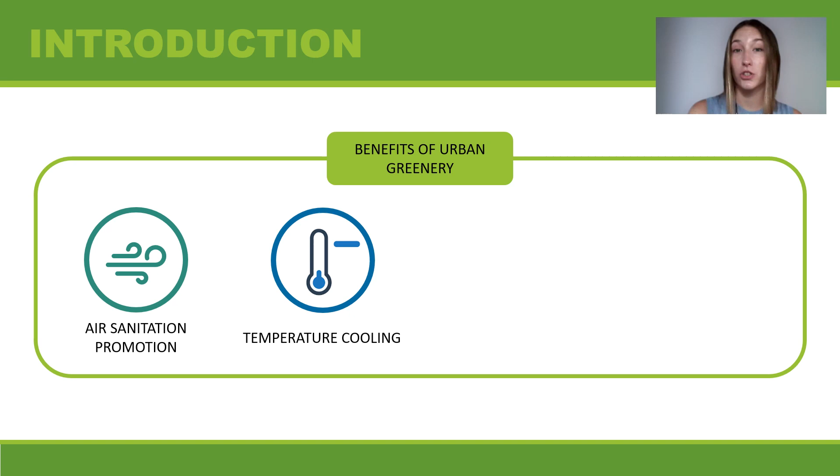Green spaces add to the provision of ecosystem services in urban areas. Urban greenery encompasses parks, squares, street trees, and private gardens, and comprises a significant aspect of all cities. They allow us to mitigate harmful effects of environmental pollution by promoting air sanitation, cooling temperatures, retaining precipitation, and attenuating noise through sound absorption capacity.

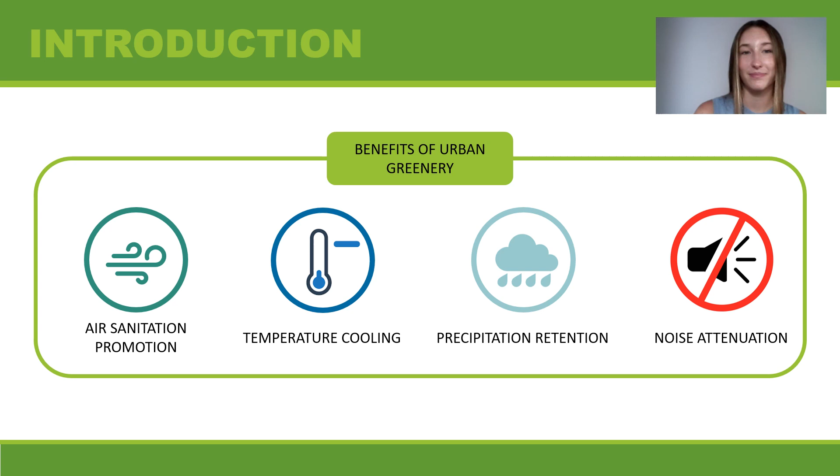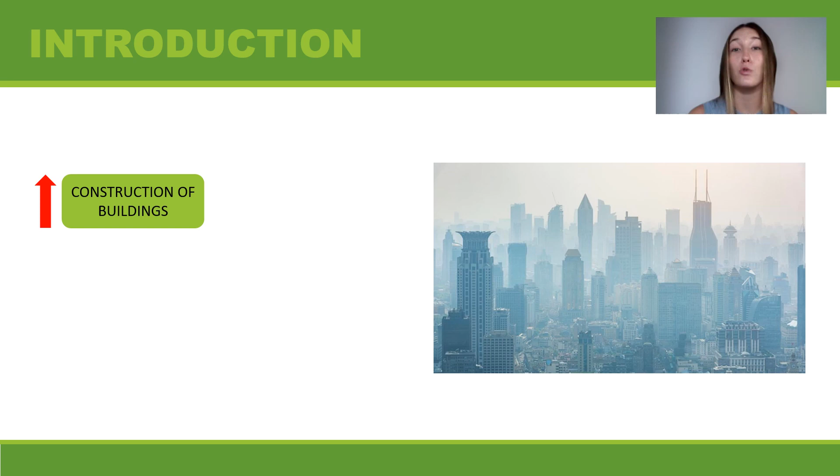Throughout the years, exacerbated by population growth, cities have increased the construction of buildings and streets to satisfy people's needs. This way, green spaces have been displaced and reduced, and with them the benefits they contribute. If this growth were to occur without fundamentally addressing the climate impacts of intensified urban development and global warming, many cities will become much hotter and less livable.

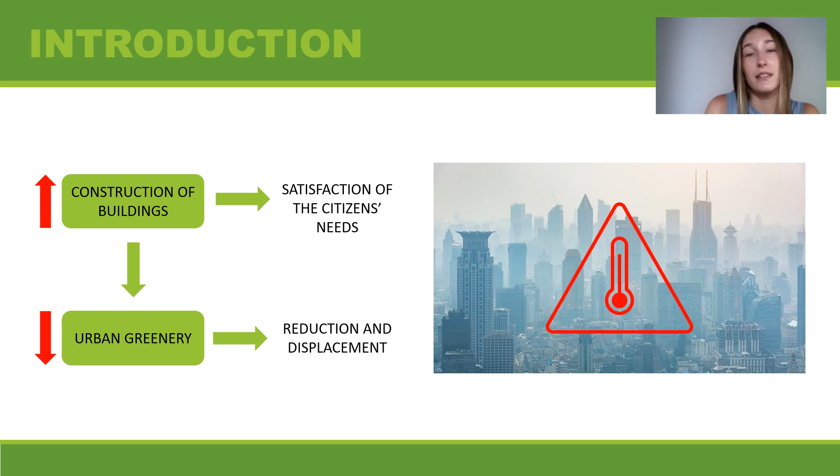The United Nations 2030 Agenda and its Sustainable Development Goals have developed a path to stop and mitigate this heating process taking place in many urban areas of the world. More specifically, there are two SDGs that refer to this issue. First, SDG number 11, which centers around making cities and human settlements inclusive, safe, and sustainable. And then SDG number 13, which looks forward to taking urgent action to combat climate change and its consequences.

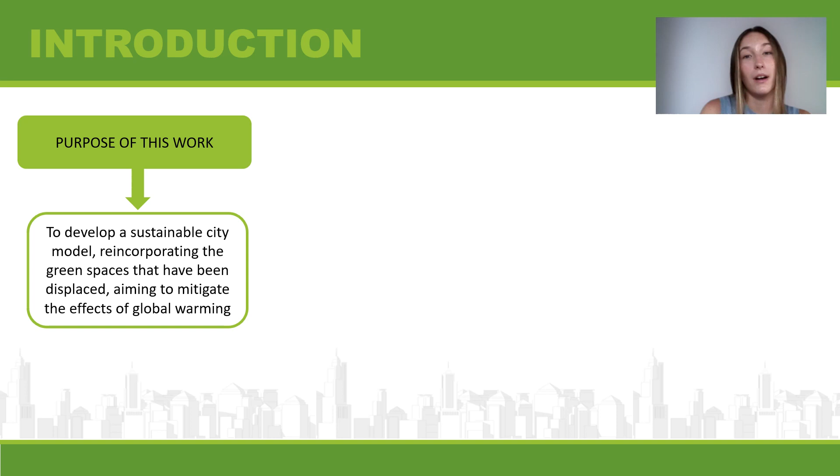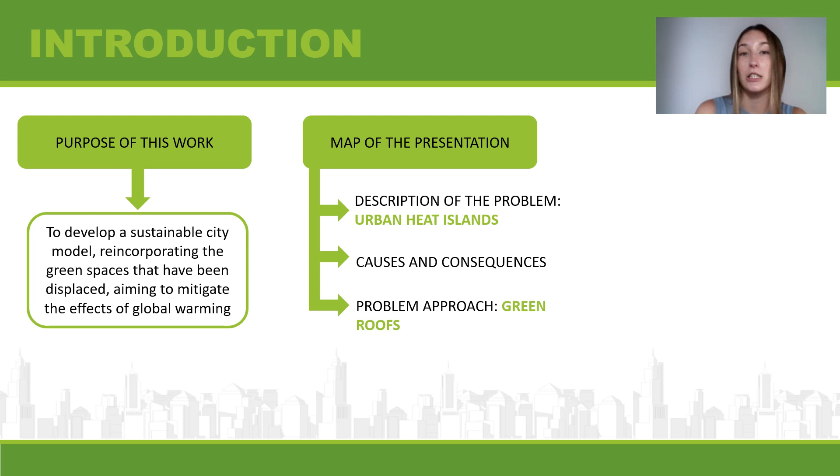The purpose of this paper is to develop a sustainable city model reincorporating the green spaces that had been displaced, aiming to mitigate the effects of global warming. To do so, a description of the problem and its causes and consequences will be introduced. This will be followed by the presentation of green roofs, used as a construction method that incorporates greenery into its structure. In the last section, an evaluation of the effectiveness of this proposal will be introduced.

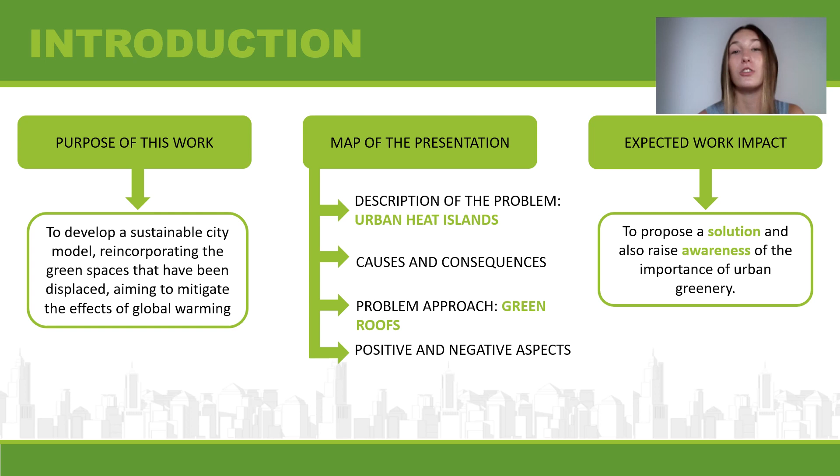It is expected that this paper may not only propose a solution, but it may also raise awareness of the importance of urban greenery.

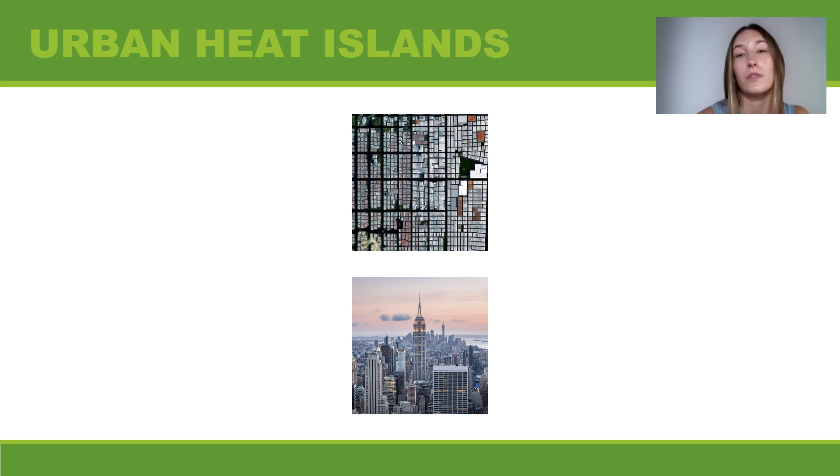Due to overpopulation and the consequent housing emergency, construction companies are supplanting much-needed vegetated surfaces with more and more buildings made of low albedo materials. Albedo is the relative amount of light that a surface reflects compared to the total incoming sunlight. A surface with high albedo will reflect more sunlight than a surface with low albedo. Therefore, low albedo materials used for constructing high-density buildings are one of the major causes of increasing temperatures in the urban environment, known as the urban heat island effect.

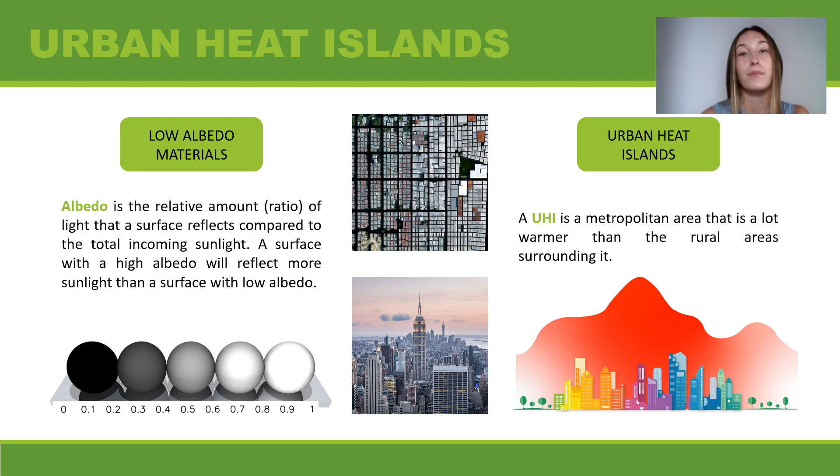The urban heat island is a metropolitan area that is a lot warmer than the rural areas surrounding it. This is the reason it is theoretically considered an island.

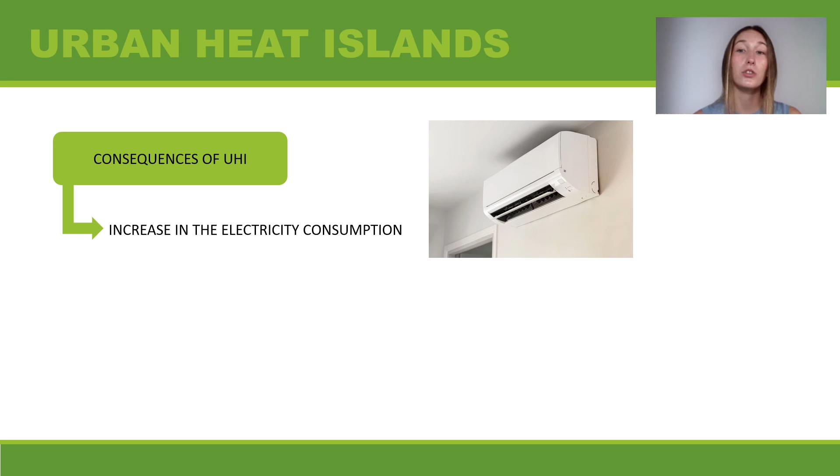The temperature rise carries a variety of consequences that affect many aspects of an individual's life. Some of them are the increase in electricity consumption due to the need of regulating the temperature inside buildings for the owner's comfort. Here, a vicious cycle begins to generate, where due to the increase in temperatures, the necessity of air conditioning also increases.

Then we have the reinforcement of climate change, because the increase in electricity consumption adds to atmospheric pollution and greenhouse gas emissions.

Then there is impact on water quality, because the transfer of excess heat accumulated in rainwater produces hot currents that are dumped into streams and rivers. This can also be harmful to the health of the ecosystem.

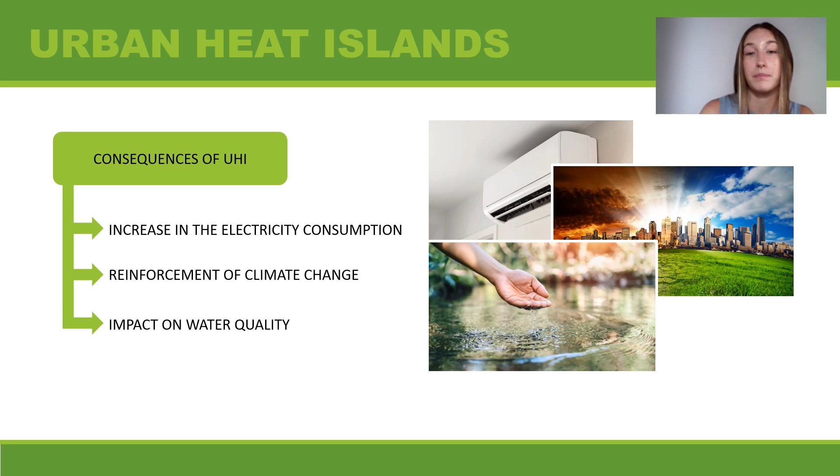And then we have the deterioration of human health, since heat waves generate discomfort, breathing difficulties, exhaustion, and even cardiac arrests. These high temperatures also generate certain conditions that, combined with other factors such as water storage and poor hygiene, cause an increased risk of diseases such as dengue, for example, nowadays.

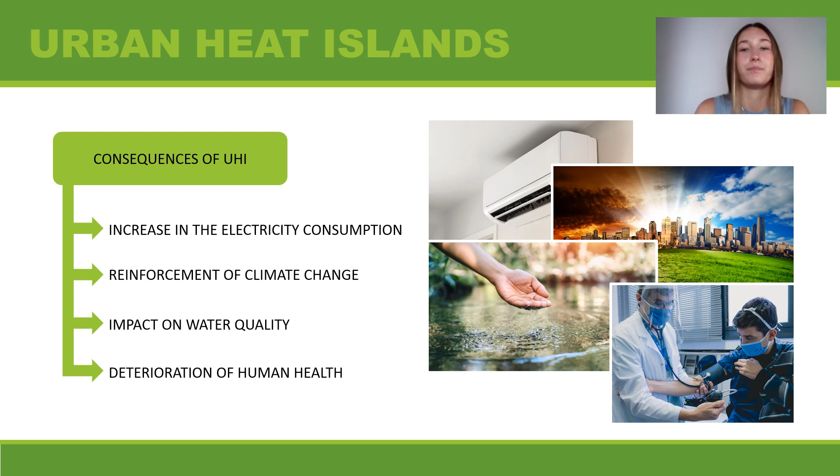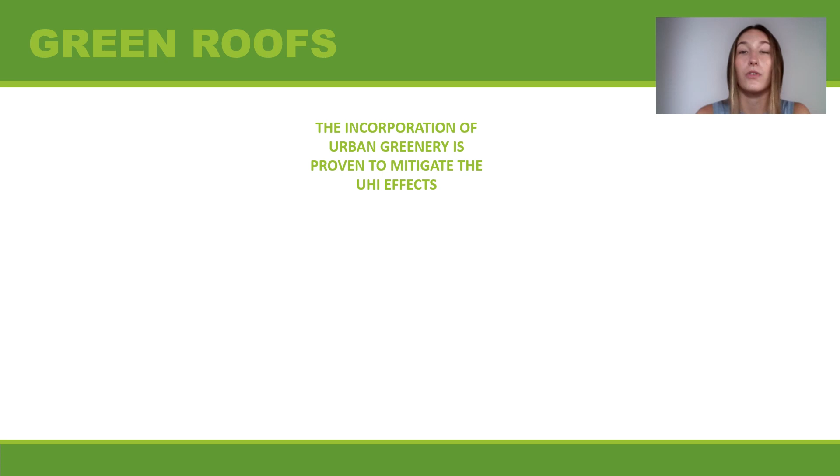The lack of green spaces in highly urbanized zones increases congestion and pollution daily, and consequently impacts citizens' lives. Therefore, the incorporation of urban greenery is proven to mitigate UHI effects. An innovative and less conventional way to integrate spaces for growing greenery are green roofs.

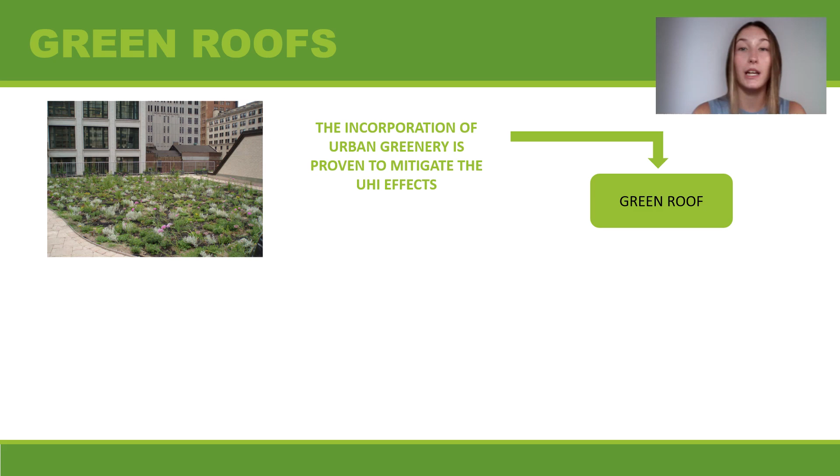A green roof is a building system with a plant finish on a bed of soil or substrate that is especially designed for obtaining environmental benefits. The plant cover may be total or partial, and it does not refer to terrace roofs with potted plants, but to building technologies for improving the habitat or saving energy consumption, or technologies that fulfill an ecological function.

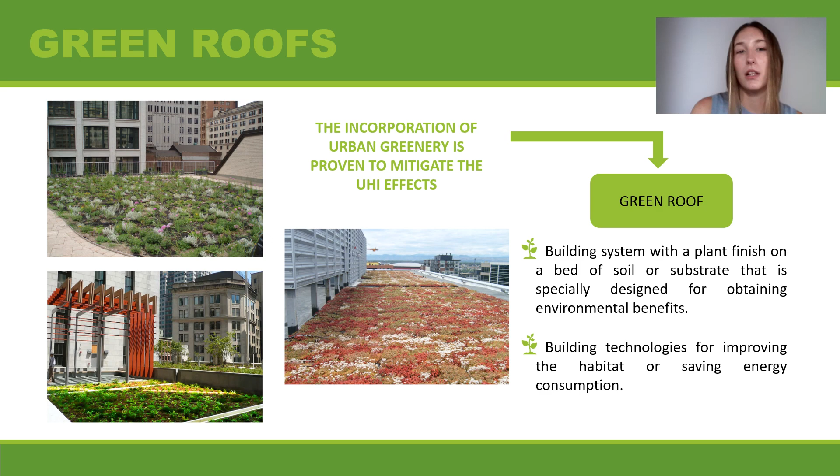Green roofs can be classified according to either the type of plants desired to place or the structure in which it will be located. First, we have the extensive green roof, recommended for building structures with limited load-bearing capacity and in areas with no or minimal regularity of use. It provides a meadow effect, which requires only low maintenance.

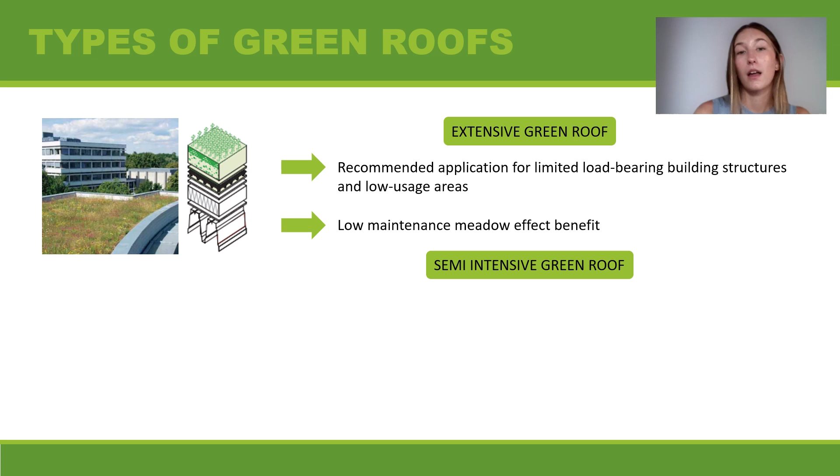Then we have type 2, semi-intensive green roof. It is used where there is the desire to create a pleasant environment that can be used by those working or living at the location. This roof is ideal for the creation of an outdoor living space. It utilizes basic plant types, which require more maintenance than the extensive roof.

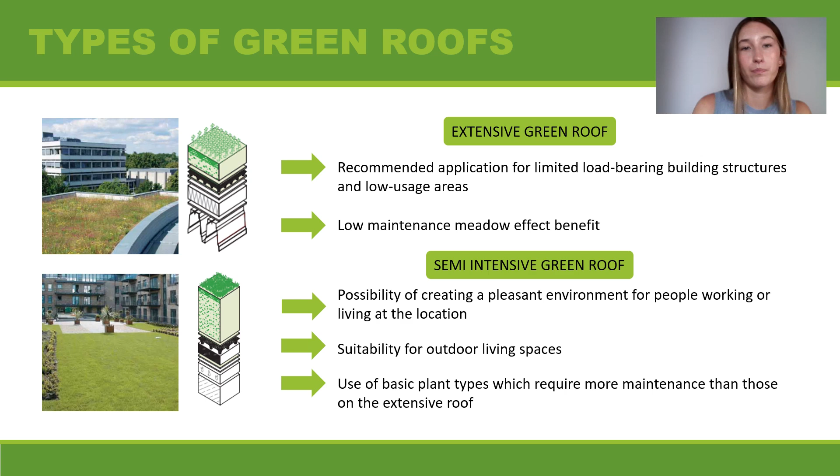Moving on, we have the intensive green roof. It's a system designed as a landscaped roof garden, which might include an irrigation system. It opens practically all the possibilities of normal ground-level gardening, and it is ideal where a suitable, strong load-bearing structure is available.

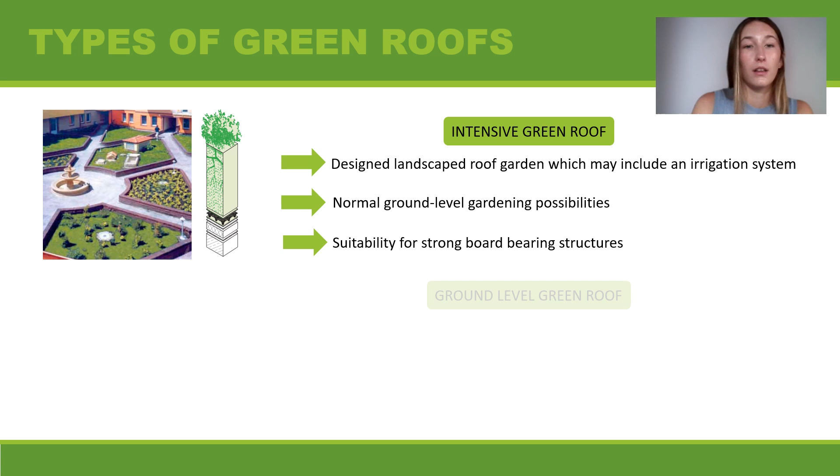And next, we have the ground-level green roof. It is used in circumstances where substantial planting is realized using heavy mechanical plant and equipment during construction. It is considered suitable for ground level structures such as underground car parks.

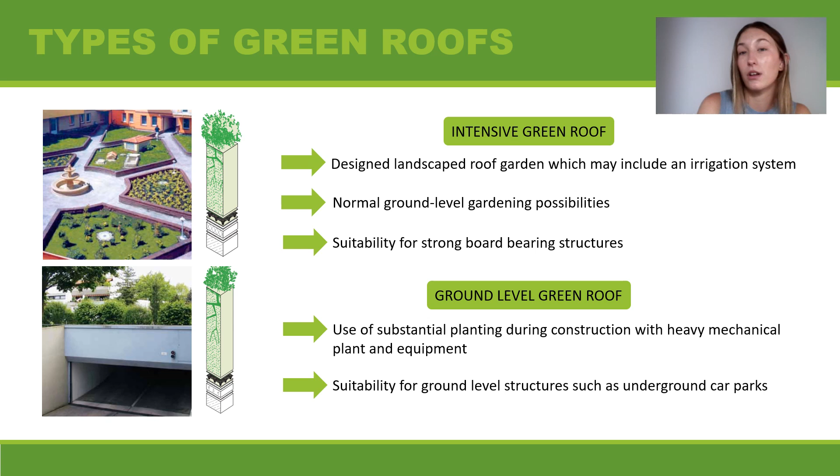Every green roof must have a good composition of layers of suitable materials that provide it with a proper structure. So next, a typical build-up of a green roof model will be presented.

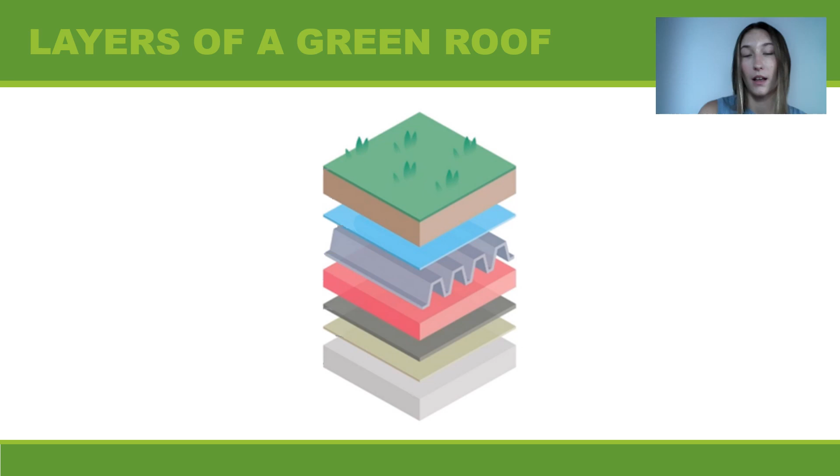On the top, we have the plant cover. The type of plants used depends on whether a low-maintenance extensive roof is chosen or an intensive one. The former is limited to succulents, grasses, and herbs, and the latter can be planted in accordance with the wishes of the gardener.

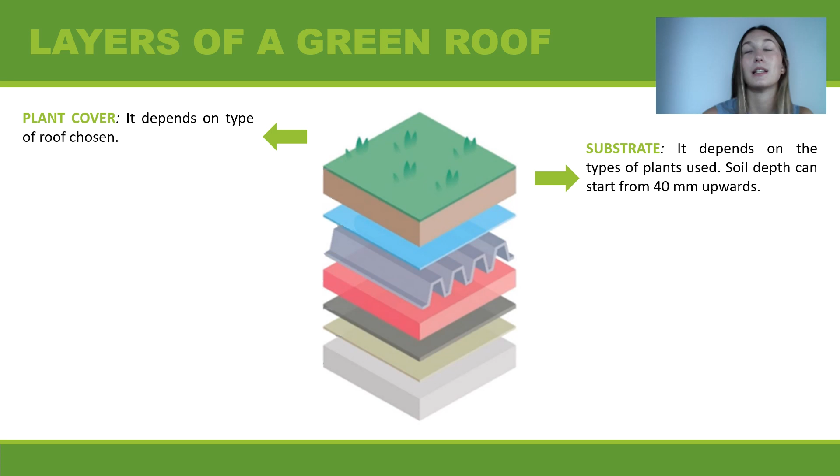Next, we have the substrate. The depth of growing media to use depends on whether the roof is the extensive or the intensive type. Soil depth can start from 40 millimeters upwards.

Next, we have the root permeable filter fabric. It is a polypropylene fabric placed between the drainage layer and the growing media to prevent the media from migrating into the drainage layer and clogging it. The filter fabric must not impede the downward migration of water into the drainage layer.

Then, as we've mentioned, we have the drainage layer, which is placed to quickly remove excess water from the vegetation root zone.

Then we have the protection layer. This sheet is for mechanical protection of the water insulating layer during construction work. It retains moisture and allows roots to grow through, thus enhancing cohesion to the layers above.

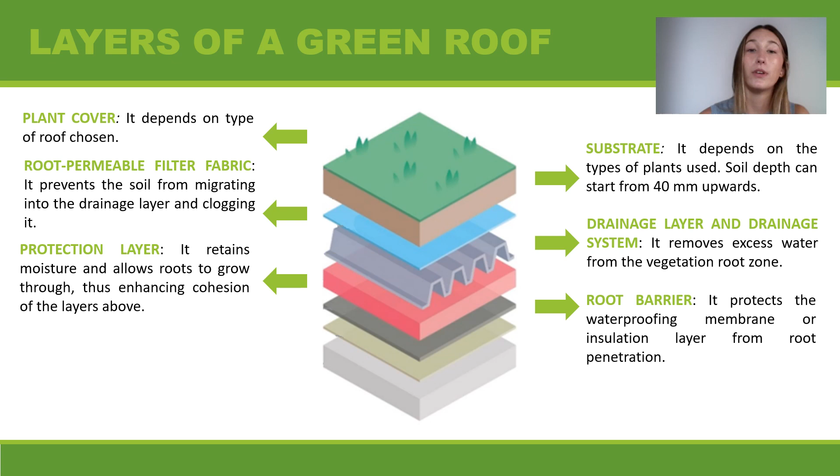Then we have the root barrier. It protects the waterproofing membrane or insulation layer from root penetration.

Then we have the waterproofing layer that prevents water damage through the deck layer. There is a wide range of waterproofing materials, including hot applied rubberized asphalt, built-up bitumen, modified bitumen, thermoplastic membranes, polyvinyl chloride or PVC, thermoplastic olefin membrane (TPO), and elastomeric membranes.

And finally, at the bottom, we have the deck layer. The roof deck layer is the foundation of a green roof. It may be composed of concrete, wood, metal, plastic, gypsum, or composite material.

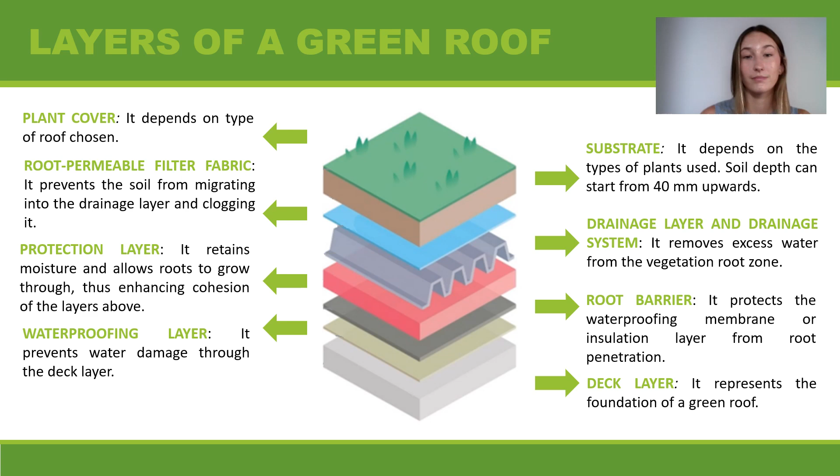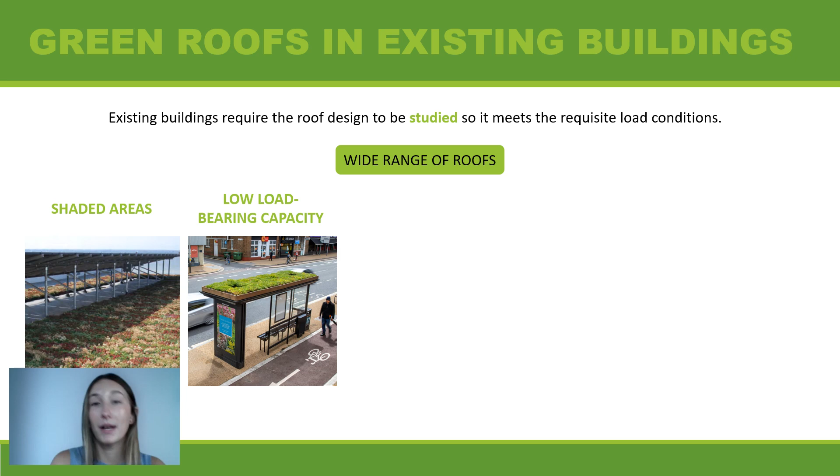Existing buildings require the roof design to be studied so it meets the requisite load conditions. But either way, green roofs can be installed on a wide range of roofs, including those with shaded areas, with low load-bearing capacity, on high-rise buildings, with limited access, and even on sloping roofs.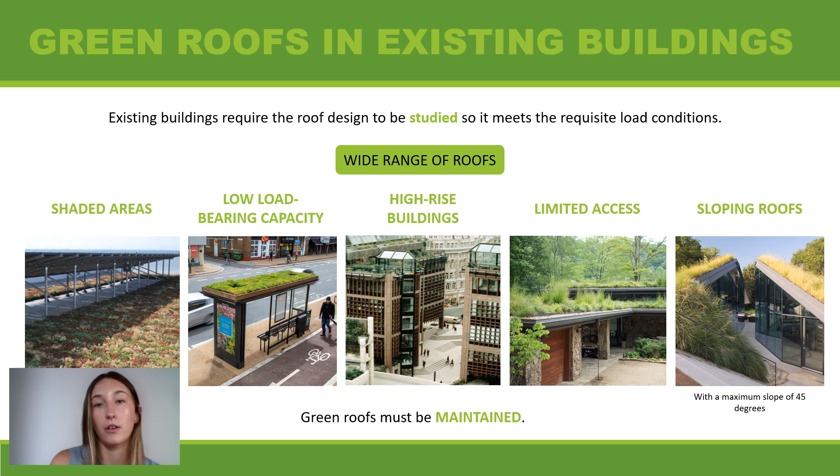Now we're going to talk about the positive aspects of green roofs. Thanks to the ecological and economic advantages and free space they offer us, green roofs are beneficial for people and the environment. They also help to improve the life expectancy of buildings and their energy balance.

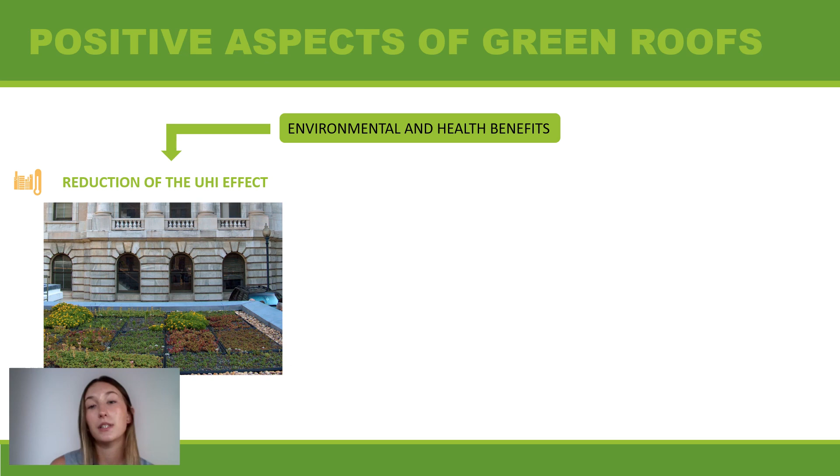One of the main ecological advantages that comes with green roofs is, as expected, the reduction of the UHI effect. This is achieved through the process of transpiration and humidification of dry air, which improves the climate and increases people's sense of well-being.

Another aspect is the optimization of air quality through vegetation. It has been demonstrated that it is effective in reducing atmospheric pollution thanks to its capacity for filtering particles and absorbing pollutant gases.

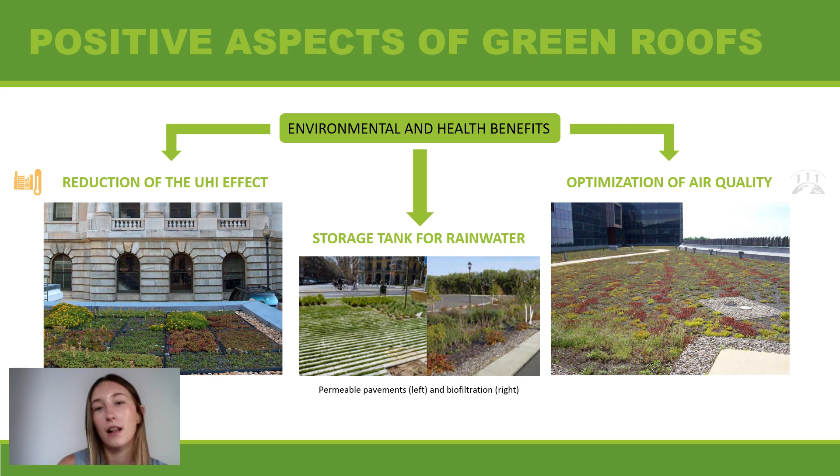And then another positive aspect is that they also act as a storage tank for rainwater. Rainwater can be reused through system technology for irrigating the roof itself or put to other uses such as cleaning or cooling appliances. They also prevent local floods.

As to buildings, a green roof provides an extra layer of insulation. Hydraulic insulation is achieved because both the vegetation and the substrate protect the waterproofing membrane by alleviating the effects of temperature fluctuations. There is also an acoustic insulation improvement.

A green roof reduces the reflection of sound by up to 3 decibels and improves acoustic insulation by up to 8 decibels.

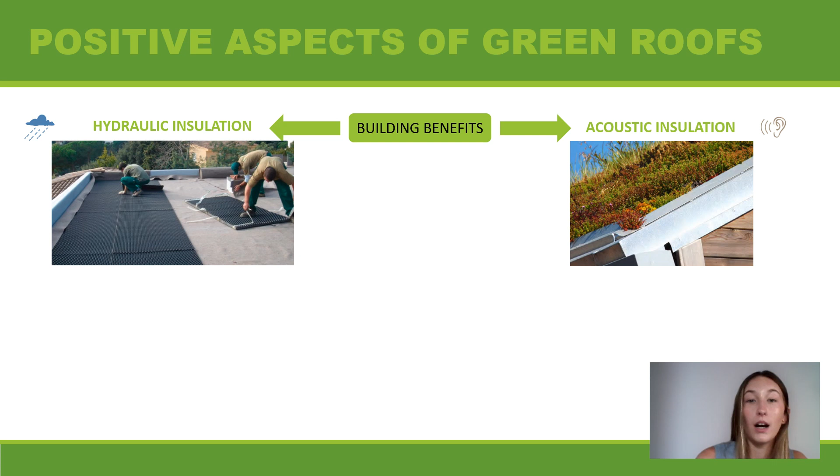However, one of the most important building benefits of green roofs is their thermal insulation properties. This additional insulation reduces temperature transfers between the inside and the outside of buildings. They reduce excessive heat during the summer and minimize heat losses in the building during the winter.

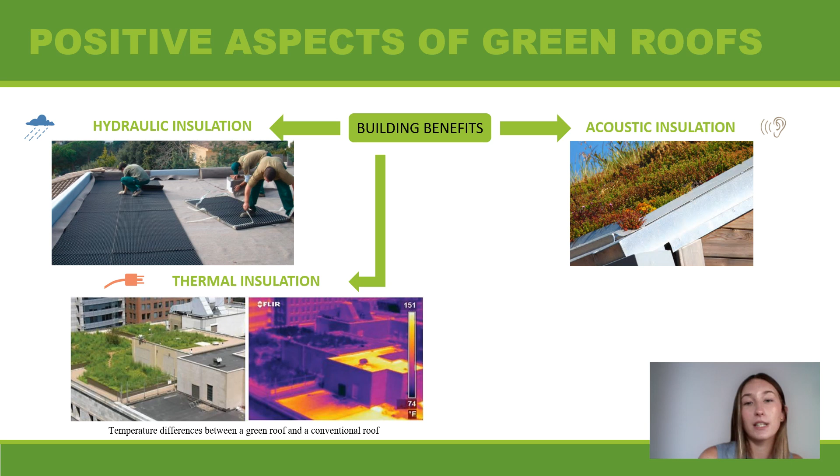This statement can be illustrated by the image we have here. It shows a green roof built over the City Hall of Chicago, USA, and the effects it has on the surface temperature, demonstrating a difference of 40 degrees compared to conventional materials.

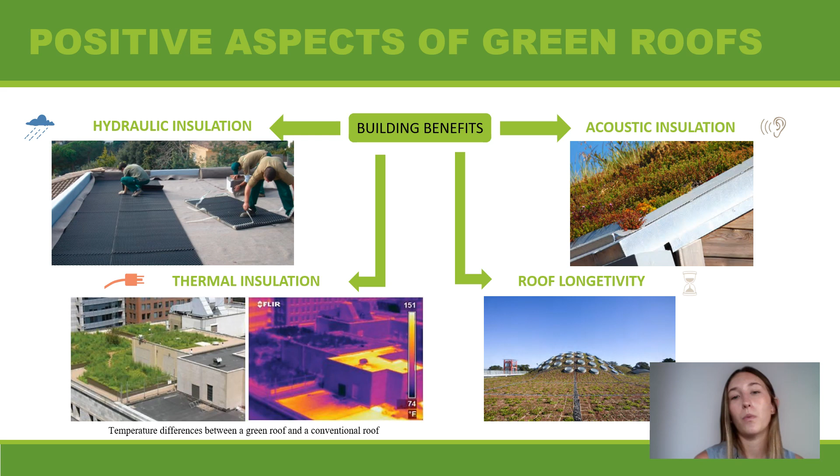Green roofs can also contribute to roof longevity. They more than double the number of years typically needed before a roof must be replaced as compared with conventional and white roofs.

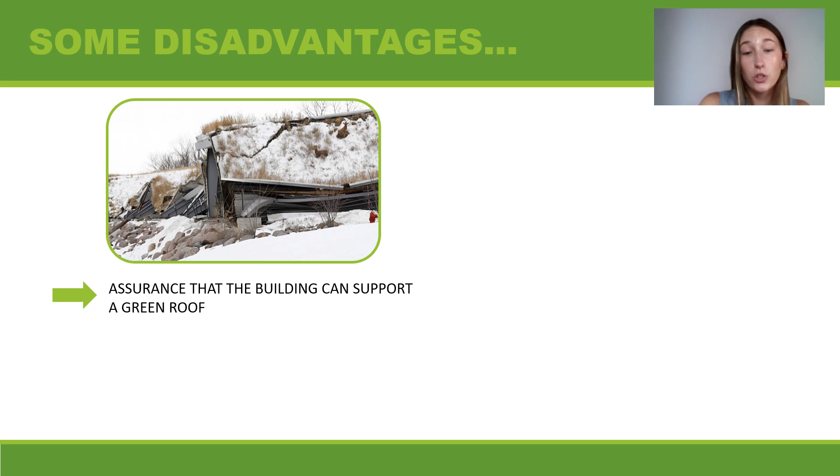Green roofs may present some disadvantages: assurance that the building can support a green roof, quality installation and leak prevention, maintenance requirements, and potential plant loss. Despite these issues, many involved citizens have been trying to implement green roofs on their urban landscapes. Although not all of them have achieved it, the persistence in spreading this proposal has been of great importance to achieve a change.

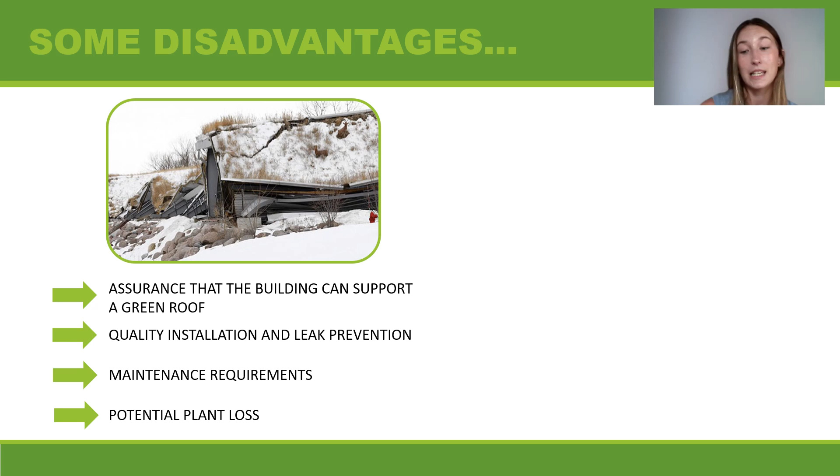Here is a quote from one of the founders of the Rootscapes team in Paris: "To have any meaningful impact on the city, you must have a lot of roof terraces, but we have seen an evolution of the mentality around this issue. A few years ago, people weren't interested in climate change. Now they've realized it is urgent."

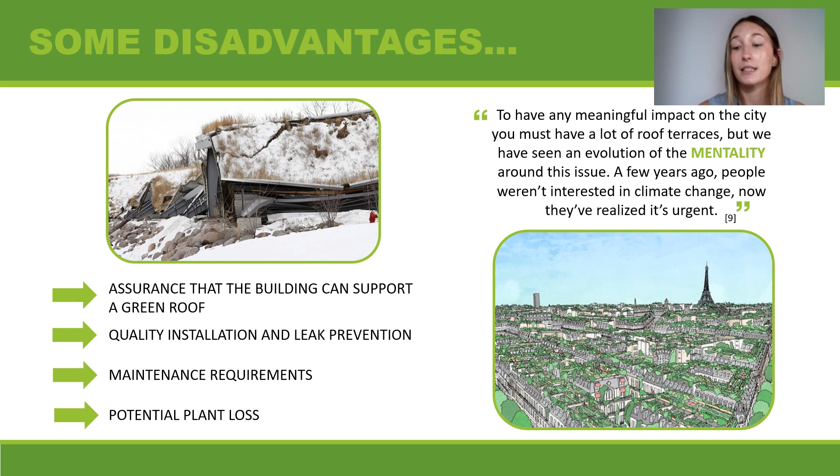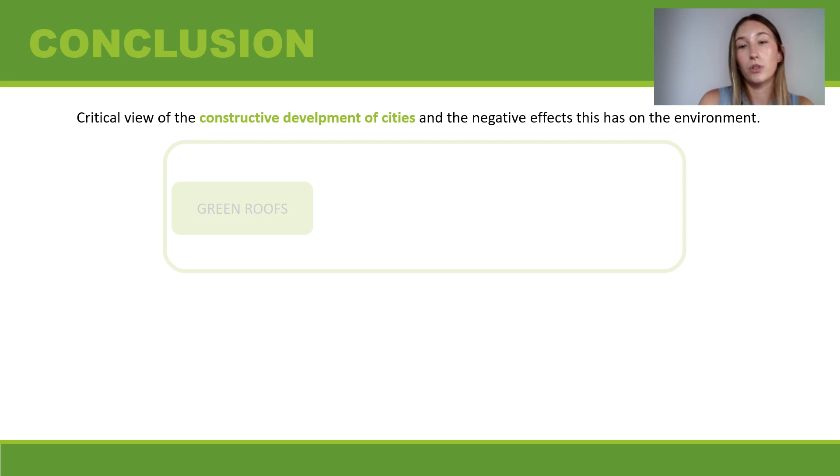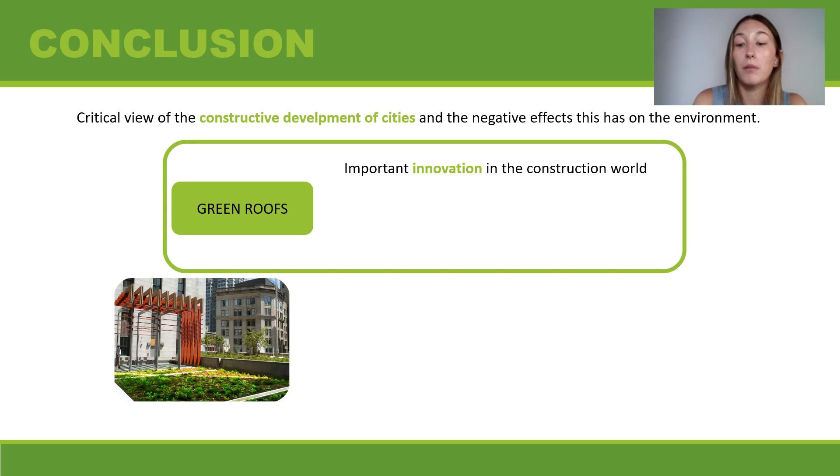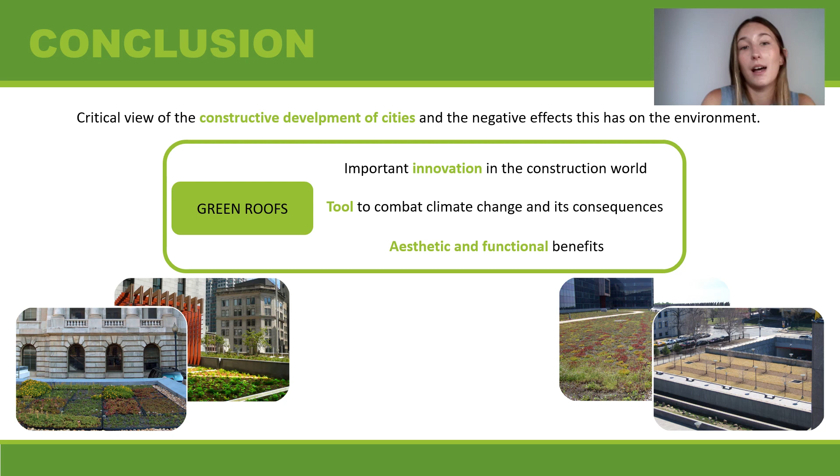As a conclusion, we have to say that in this presentation, a critical view of the constructive development of the cities and the negative effects this has on the environment has been provided. Green roofs are presented as an important innovation in the construction world that not only have both aesthetic and functional benefits, but they also become a tool to combat climate change and its consequences. By means of this approach, citizens and urban planners have a better alternative with compelling positive impacts for sustainable urban development.